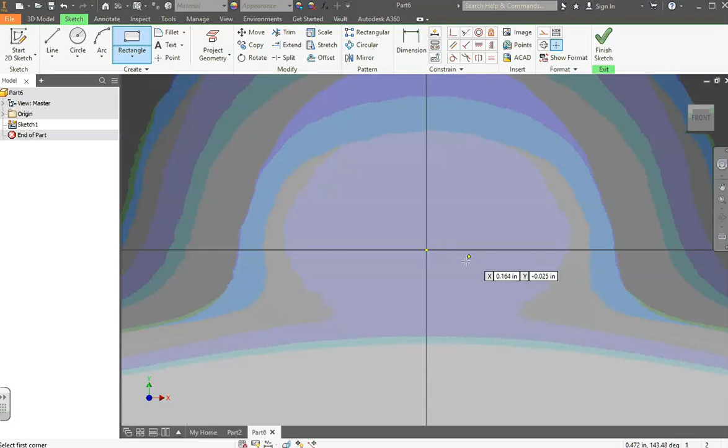Let's go to New, Standard Document, and let's start sketching. We'll go to our XY plane or our front plane. Let's draw a rectangle. I want to click and drag, and I want this to be pretty big, so I'm going to zoom out until it looks like a little over 10 inches in width and a little over 6 inches in height. Around 10 to 15 inches for the width, and around 5 to 10 inches for the height.

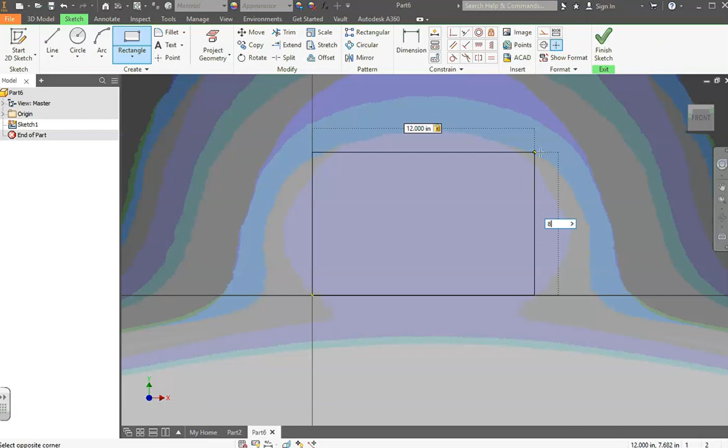You can hit Tab on your keyboard to go between these two measurements. You can see which one's highlighted. I hit Tab and the other one's highlighted. I want to look at the width, and I'm going to make that 12 inches, then hit Tab, not Enter, to go to my other line. I'll type that one in as 8 inches. I'm going to make this a 12 by 8 rectangle, and then hit Enter. As you can see, we have a 12 by 8 rectangle that is fully constrained.

We can finish our sketch and extrude this. Let's make this extrusion 8 inches. If we don't like this and want to play around with it, we can always go back and right-click on the feature we just created in our browser and go down to Edit Feature to change that dimension if we didn't want it to be 8, but we do.

So from here, let's look at what we need to add next. Let's go back and look at our picture. We can see we've got some edges that are sort of coming out of the big box shape in the first place, so let's go ahead and do that now.

What I'm going to do is right-click on this face here and go to New Sketch. Instead of redrawing this rectangle—what am I talking about? Well, if we look really closely, we can see it doesn't exactly come out all the way. There's a little edge that's not popping out. So instead of redrawing this square, I want to draw Project Geometry.

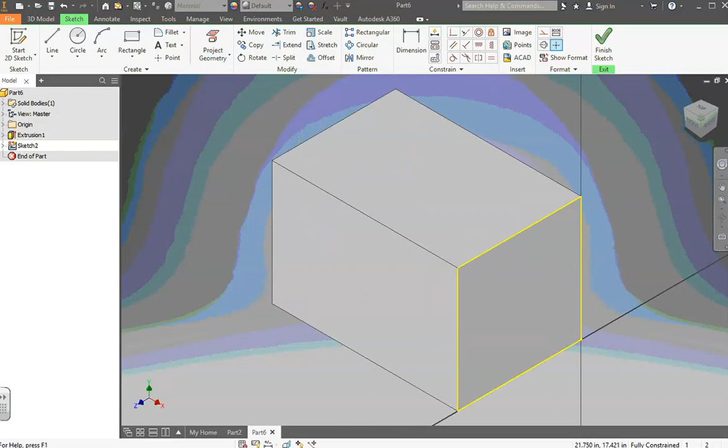I want to click Project Geometry. What does this do? It allows us to project a shape that's already drawn onto our sketch. So I'm just going to click on the square, and you can see I've got a yellow rectangle on here now. It's projected onto our sketch, so I don't have to redraw that square. It's already measured for me and everything.

I'm going to click my Offset feature here next to Project Geometry in my Modifies, and click on this rectangle, which I can make either bigger or smaller. You can do this with any shape. I want to make it a distance smaller of 0.1 inches, and then hit Enter.

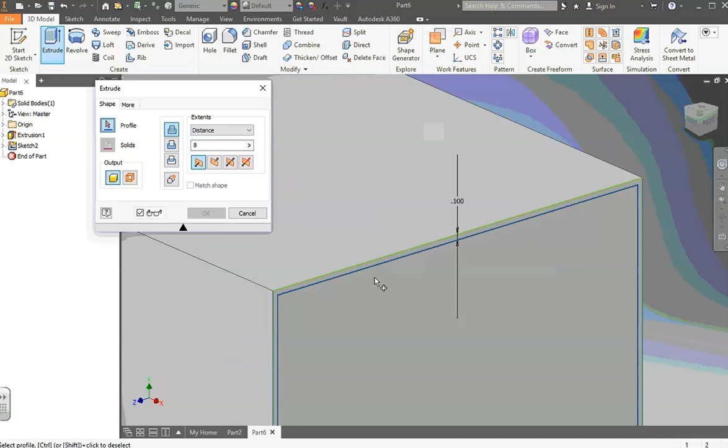Right-click OK, finish my sketch. And I want to extrude, not the outer shape—you could do the outer shape, but I want to do the inner rectangle. You could do the outer shape on accident, but you don't want that. So I'm going to go back to extrude and do the inner rectangle. I don't want it that far, so I'll make it 1.5 inches.

And if you look back at the picture, you can see it's kind of slanted, not exactly straight. What that's called is a chamfer, and it's here in your Modify and 3D Models next to Fillet. So let's go ahead and click Chamfer.

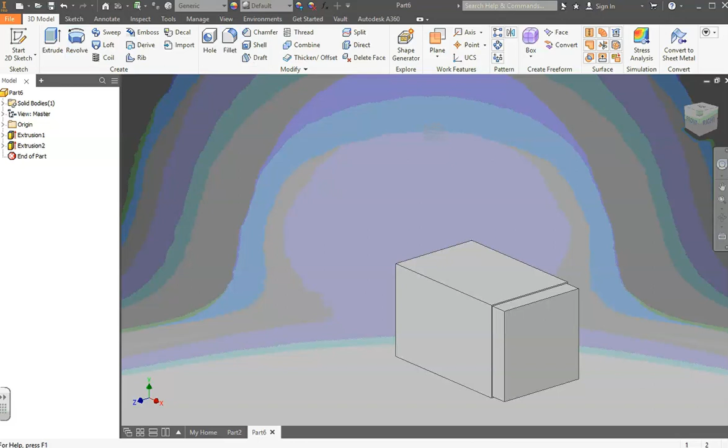It allows us to give it an edge. I'm going to make this edge 1.5 inches, and click on each one of these 4 edges that I just created. You can kind of see what's happening here. I'm going to hit Apply and close this out.

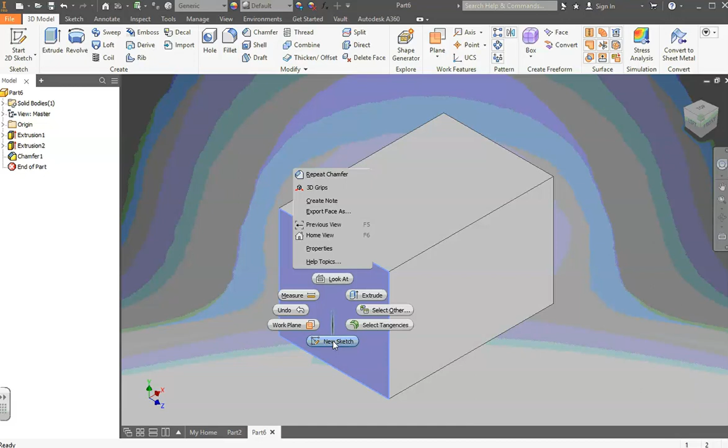I'm going to do the exact same thing on the other end. Right-click on this face, go to New Sketch. Again, I want to project this square, then click Offset and drag it in, again making it 0.1 inches. We'll finish our sketch and extrude this one out 1.5 inches as well. Hit OK, add a chamfer, make sure this one is 1.5 inches as well, and go ahead and click on those 4 corners.

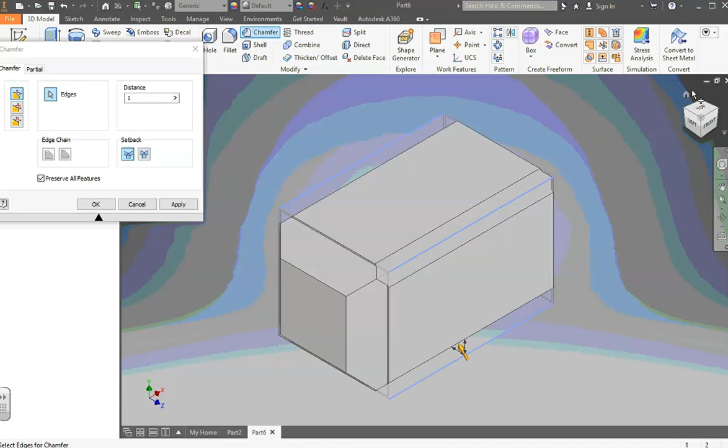If we go back and look, we can see that it doesn't just chamfer off at these edges. It also chamfers off right here on these inside edges. So we can add a chamfer. It looks like they're a little bit smaller, so I'm going to change that to 1 inch. I'm going to click on these 4 corners - 1, 2, 3, and then down here for 4. And I'm just going to hit Apply and close this out. You can see we're starting to get the outline of Thor's hammer.

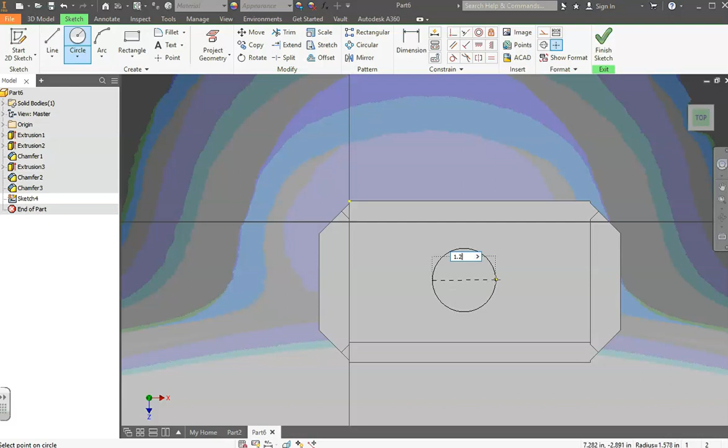What's next? Well, we need to add a handle. I'm going to go ahead and put the handle on top. I'm going to start a new sketch here, and I'm going to draw a circle. I'm going to tell this circle to be 1.2 inches in diameter. Then I want it centered.

So how to center it? What I'm going to do is click my dimension tool, and click on this line right here - not this outer line, but this inside rectangular line. I'm going to click dimension, click on that line, and then click on my circle. That'll measure to the center of my circle. I'm going to tell that to be 6 inches from the edge, since that's half of 12, and this from here to here should be a length of 12.

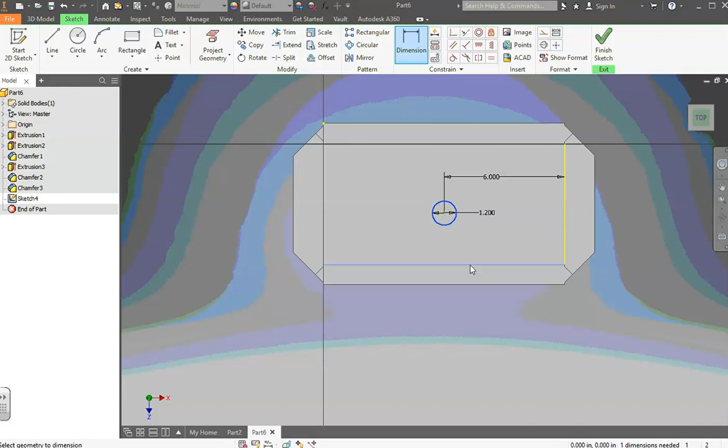Then lastly, if you right-click OK, you might notice you might still be able to move your circle up and down. Well, of course you can, because you haven't told it where to stop. So I'm going to click dimension again. I want to click on the circle and click on this edge. You might recall that before, this was 8 inches long. So let's go ahead and divide that by 2 - we'll make it 4 inches. You say, well, wait Mr. Anderson, that's not centered. And that kind of makes sense.

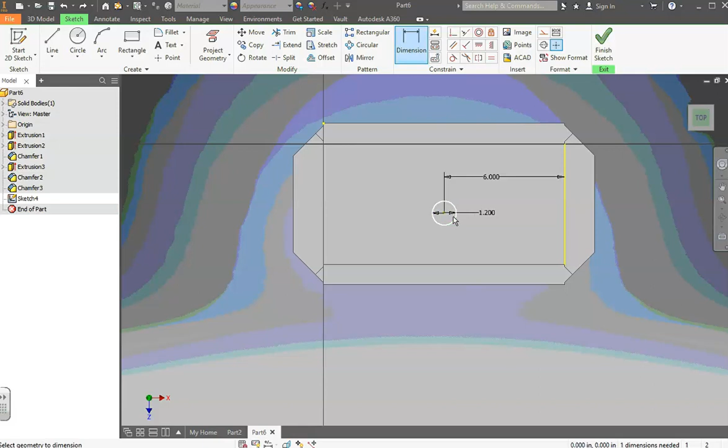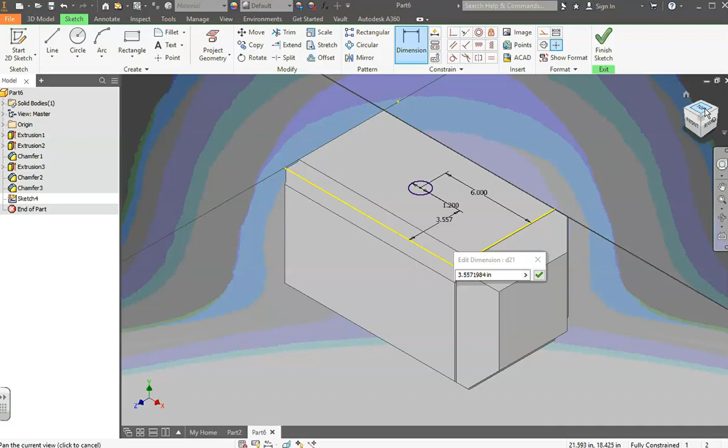So I'm going to hit Control-Z to fix it, and Control-Z again to get rid of that dimension. This time I'm going to measure it to this outside edge. Why am I going to this outside edge before I type it? Well, if you hit the corner button, you can kind of see what's going on here - this was my edge. So what is he talking about? Well, if we look, this was the original face before that chamfer. So we want to measure it to this line this time. This line was our original edge before we extruded out another shape, if you recall. But back to the point, let's go ahead and add to this dimension, and make it 4 inches to make it halfway through. Now we've got a circle that's perfectly centered.

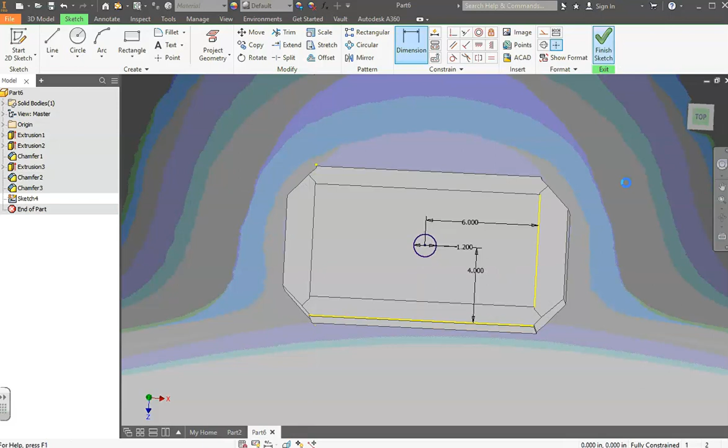Let's go ahead and finish our sketch and extrude this shape up. Let's make it 12 inches. Okay, we've got our handle.

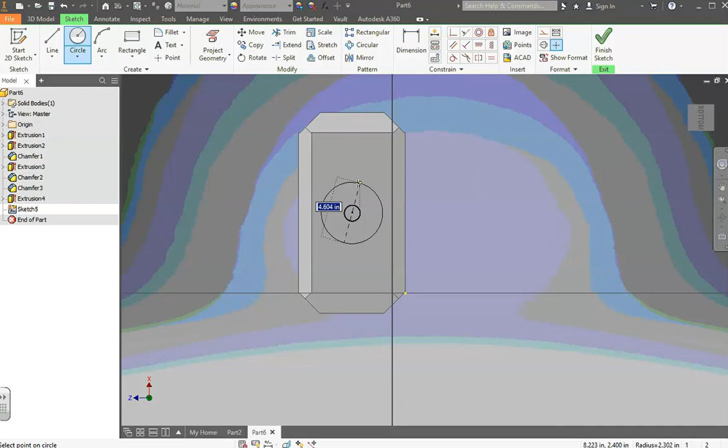The last thing I want to add is this weird circular thing on top. So we'll go to the other side, right click, and start a new sketch. I'm going to draw my circle, and the great thing is I don't have to actually recenter it - I already have it centered. So I'm going to find that previous circle, and center this circle with that one, and that will be centered. I'm going to tell this to be, let's look at the size here - I think 4.5 inches would be good, and hit enter.

You might say, well Mr. Anderson, what's going on with this other circle? Well, don't worry about it - that's just the other circle, the one above it, projecting onto this plane. Or let's zoom out - this is projecting, so we use our project geometry. Sometimes it'll project itself without having to click project geometry to get it there.

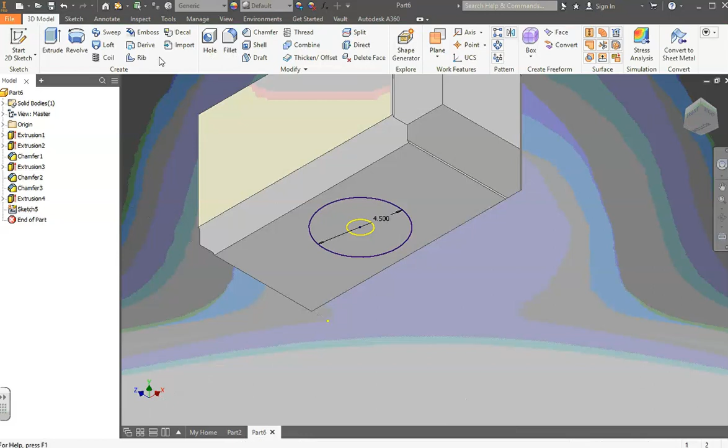From here, we're going to go ahead and finish our sketch, and we can extrude this. I want to extrude both the inner circle and the outer circle, so I'm going to click on both. I'm going to tell it to extrude 0.125. And we look, and we might decide that's not enough, so we can make it 0.25 if we want to, and that looks a little bit better. And hit OK. There we go.

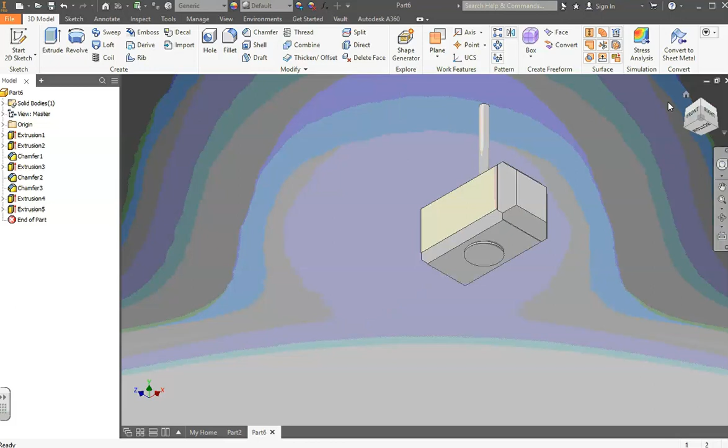We have Thor's hammer. And if you want, you could take the time to color it, decorate it, play with the features a little bit in Tools and adjust, and see if you can make this look as much or as little like Thor's hammer as you want it to.